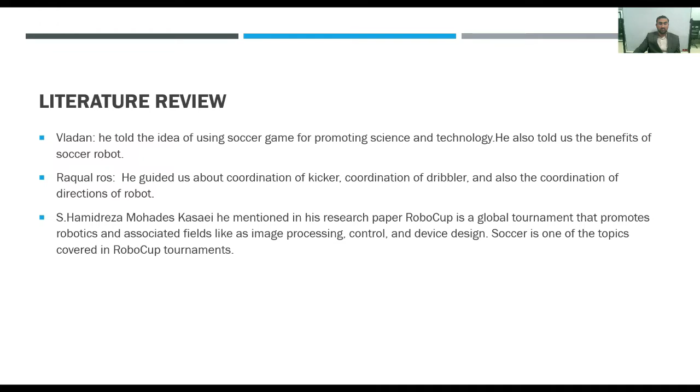When we studied these literature reviews, we were motivated to understand how we could make our project good. In our final year project, we have a total of three members.

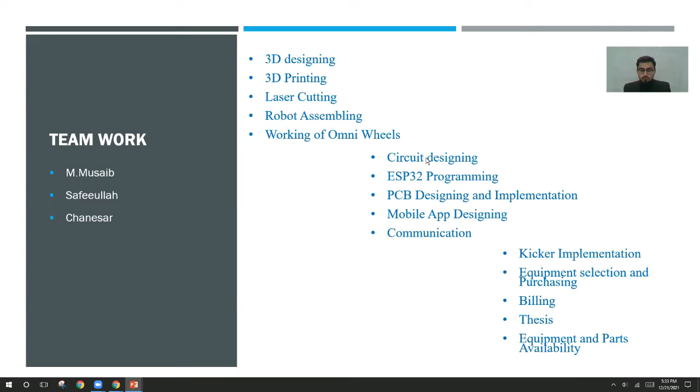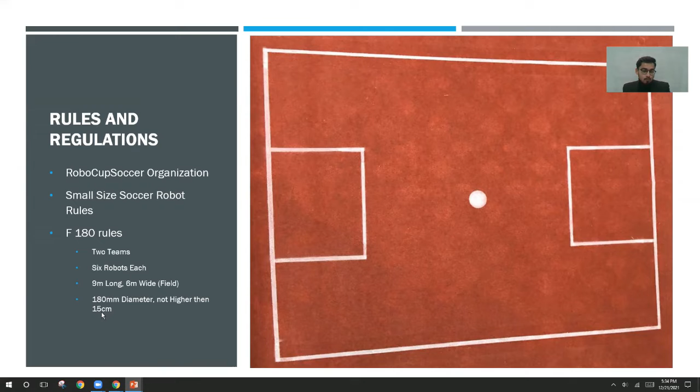The field according to the rules is 9 meters long and 6 meters wide, but our field is 4 meters wide and 6 meters long. Our project robot is basically 180 mm in diameter according to RoboCup soccer rules, and 9.5 centimeters high. According to the rules, the robot should not be higher than 15 centimeters.

For hardware and software, we basically use three softwares: SolidWorks, in which we design the 3D printing and 3D model, which I will show you further ahead; Eagle software for PCB printing; and MIT App Inventor for the mobile application.

In hardware, we use a 3D printer available in our fab lab, made by Ultimaker, and a laser cut machine called Epilog, also available in the fab lab. We use Node MCU, ESP32 module, a 12 volt 1500 mAh LiPo battery for motor control, and a 3.7 volt 100 mAh lithium ion battery for activation of the Node MCU ESP32.

An L293D motor driver is used for control of the motors, and a solenoid is used for the kicker. A capacitor charging module is also used for the kicker circuitry. A 12 volt DC motor, a simple geared DC motor, is used in our wheels. The ball used in our project is 55 mm in diameter.

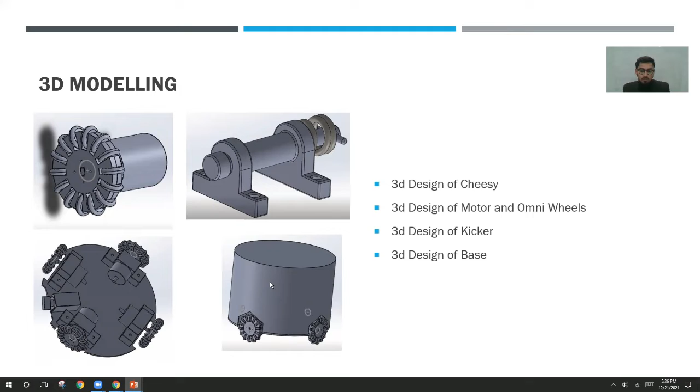Here in 3D modeling, I show you the simplest 3D models we designed in SolidWorks. Here is the wheel with motor, here is the kicker, and there is a base with 4 motors and kicker, and there is an output, a 3D design base, as shown in this PPT.

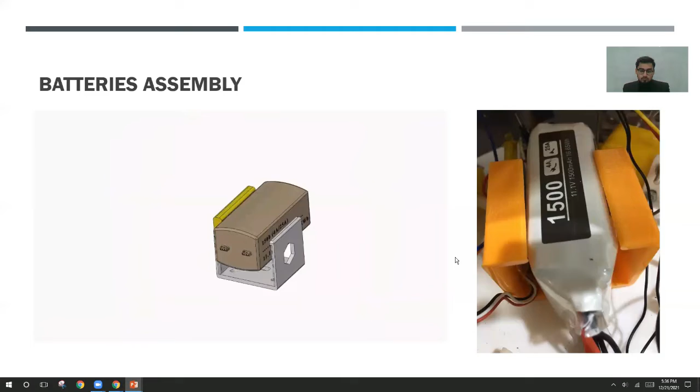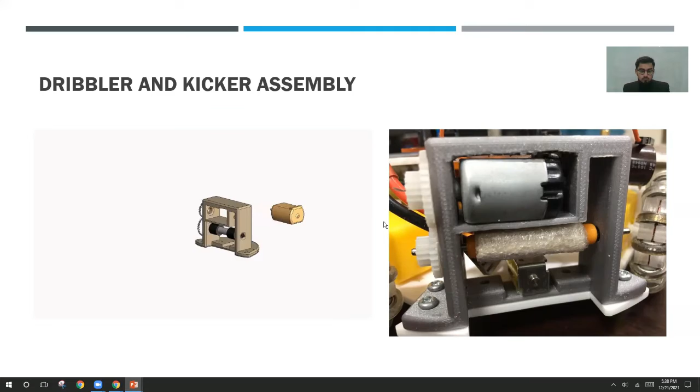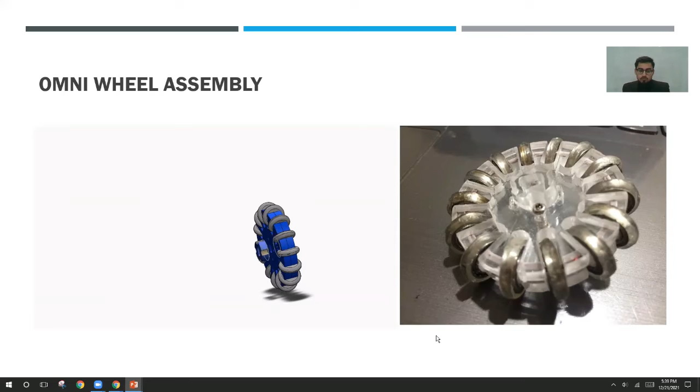This is the motor assembly with the Omni wheels. I'll play the video. These are the holders which hold the motor, and this is the assembly we done in hardware. This holder contains a bolt of 22 mm with a nut which holds the motor and the Omni wheel.

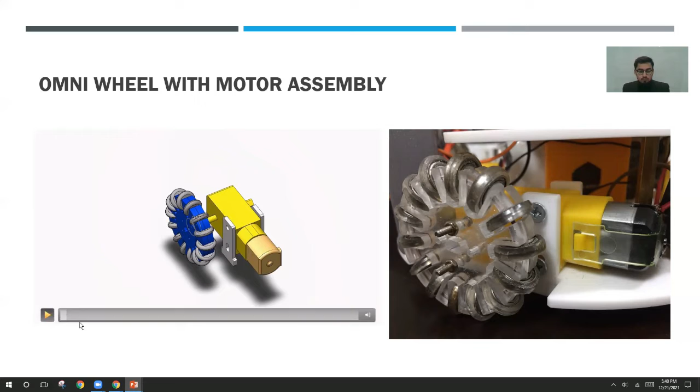This is our 3D assembly in SolidWorks, which we have done. It contains the upper part, which is the completed soccer robot assembly: Omni wheels, kicker, dribbler, and on the first floor, batteries as shown here. This is the 3D designed capacitor charging module PCB with ESP32. Here we made the first floor transparent. As we can see downward, there is a motor holder with Omni wheels. Four motors here for the Omni wheels and one motor for the dribbler. All this work is done by us, our team.

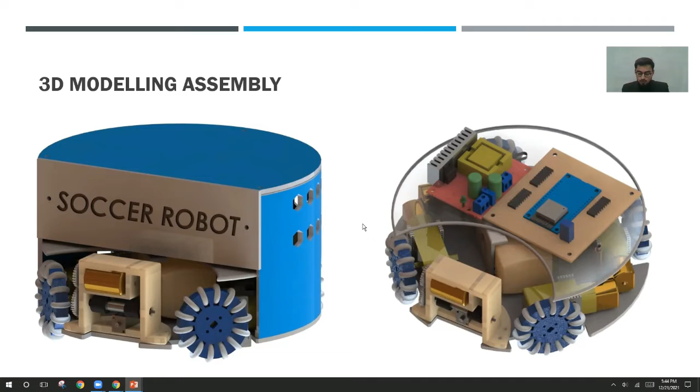Here are some snaps of the laser cutting, which we have done on an epilogue laser cutting machine. Robot base, there is a robot base with different holes for the kicker and kicker holder, and for the dribbler and motor holders, and for supporters for the first floor. There is also a first floor. Basically, the base is 180 mm in diameter, and the first floor is 160 mm in diameter, so that the upper part can easily sit in the base.

This is the laser cut motor holders, also designed in SolidWorks. This is our Omni wheels, which are laser cut with 5 mm thickness, and these, the base and first floors, and holders, are 3 mm depth acrylic sheet.

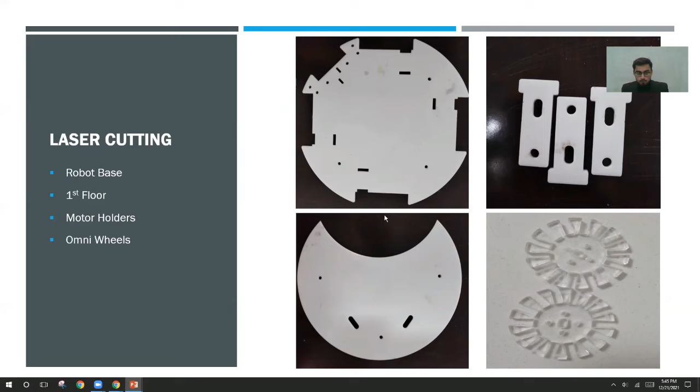Coming to the circuitry, so in the hardware parts, the components that we have used: ESP32, which is our main controller, IC L293D for motor controllers and motor drivers, transistors are used, a relay circuit is used, and boost converter, capacitors - these are all components used.

Now the advantage of using ESP32 instead of Arduino is that the ESP32 has many input output pins which can control multiple motors, and this circuit is very compact, and it has a built-in Wi-Fi function that is a requirement of our project. So coming to the ESP32, it has 19 input output pins and one TX pin and RX pin.

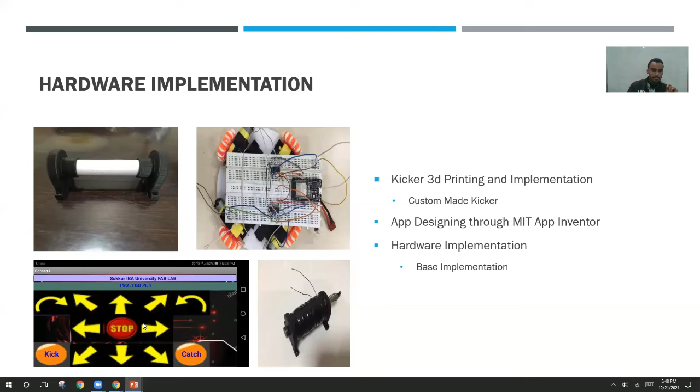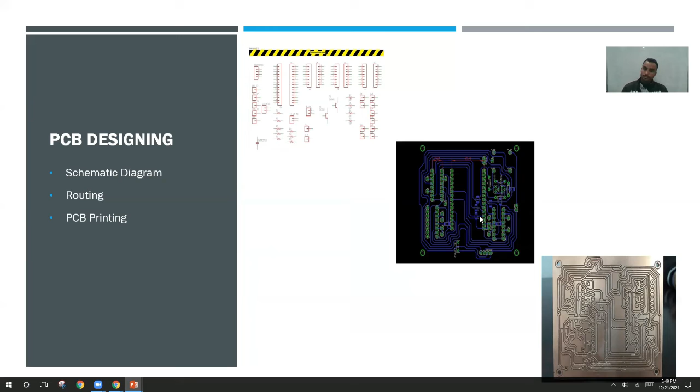So after testing on the breadboard and getting accurate results, we designed a PCB. This is the schematics diagram for placing all the components used in the circuit, and this is the routing - a very compact circuit to save cost and make it economical. This is a very complex circuit, and after all, this is the PCB printing design.

Now after soldering the components, this is the final circuitry. One boost converter is also on this, which is not shown here, but it is attached with 4 pins used for that. So this is the complete circuit.

Here relay is used for switching purpose, and these 2 transistors and resistors are used to get the 5 voltage. That 5 voltage is controlled using ESP32. ESP32's digital output pin gives 3.3 volt, and using a transistor circuit we can make 5 volt to energize the relay coil. The relay coil is only used for switching purpose.

This is the capacitor, and the booster module - also not shown here - is used to boost the voltage from 12 volts to 45 volts. We could also get 75 volts at different ranges, but according to the capacitor rating, a 50 volt capacitor is used, 1500 microfarad. So for that we have designed our boost converter at 45 volts.

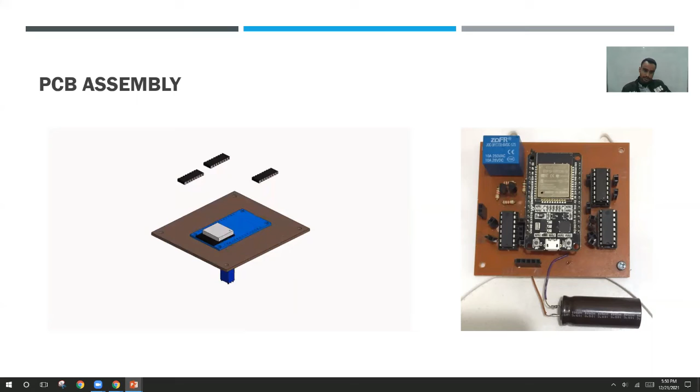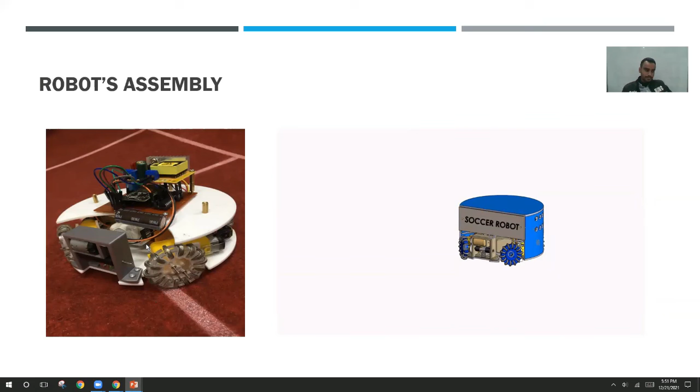This is the 16 pin motor driver IC. Now this is the shape of the robot that we ran on the field multiple times, and this is the complete design that we designed in software, and this is the hardware design. In this shape we got our circuit.

These are the apps - I've designed a 2 screen app. The first screen is this, and after logging and signing in, we can go to the second screen. On the second screen we can insert the IP address, and using that IP address we can control our robot. And this is the testing app.

Here we have controlled our robot's motor RPM. First of all we utilized the maximum speed of the motors, that is 464, and then we controlled it down to 150 RPM.

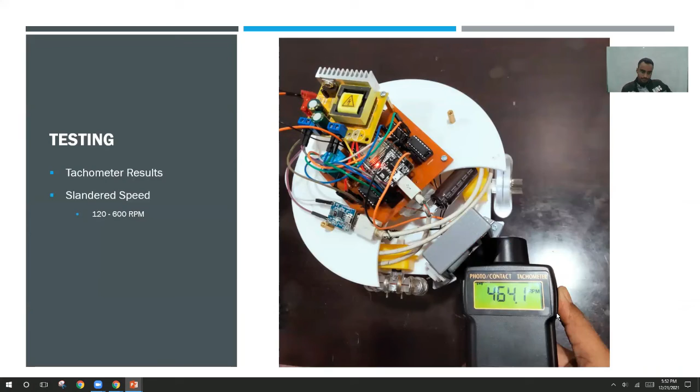Forward right, stop, forward left, backward right, right, and then left. These are the directions that we control - we did an 8 direction robot. Total directions are 8.

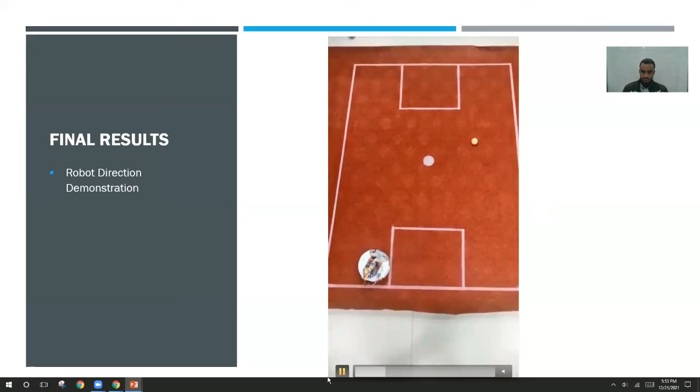And I forgot to describe the coding of the ESP32 module. In coding, we drove 5 motors, 1 dribbler, and 1 kicker circuit. Using the coding we control the speed of the motors, and also did coding for generating an IP address. After burning the code onto the ESP32 module, it gave us an IP address, and then we used its hotspot. We connected our ESP32 using the hotspot, and after inserting the IP address, we control the robot.

Making the team up - our purpose was to make a team of robots. We were given 3 robots to design, but this time we have designed only 1 robot. So in future we will design this robot to be autonomous. Thank you.